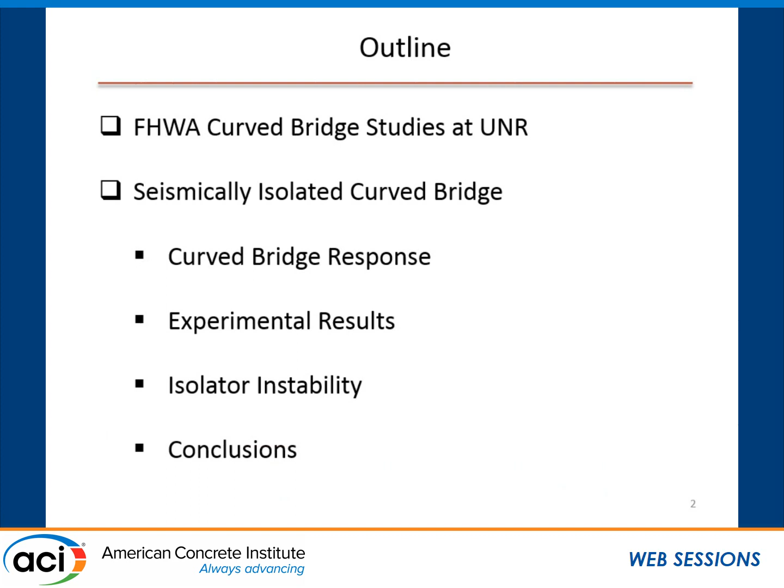Okay. So originally the co-chair of this session was Ahmed Abdel-Mohti, because he recently moved to a new university. So anyway, the topic is performance of horizontally curved highway bridge with seismic isolation. So this is the outline: FHWA curved bridge studies at UNR, then seismically isolated curved bridges, talking about bridge response, experimental works, and isolator instability, and finally conclusion.

So at UNR, they conducted a shake table test on an almost large-scale curved bridge, where they also had live load on top of it, trucks. Although they are not moving, they had trucks on the top of the deck. And the total length was 362.5 feet for the prototype. And they reduced it to almost like a half model. The model was 145 feet.

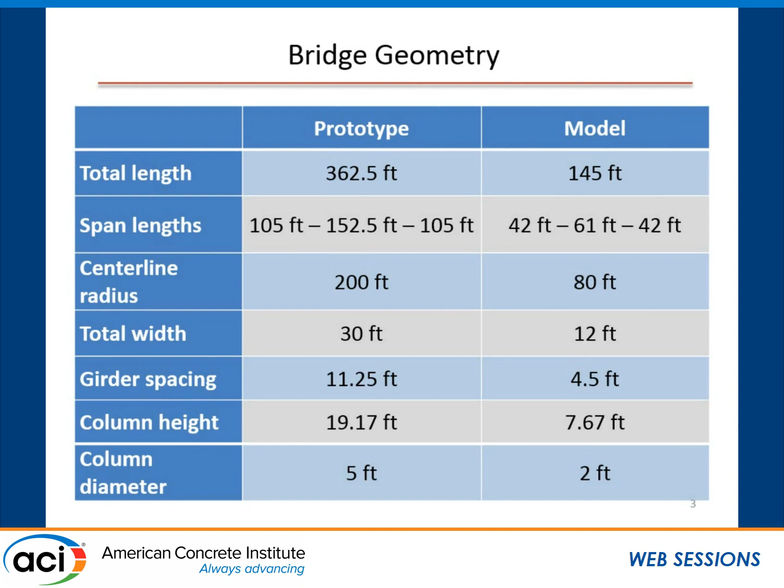The prototype had 105 feet, 3 spans. But the model also had 3 spans with 42, 61, 42 feet. And the center line radius was 80 feet for the model, and the width was 12 feet. The girder spacings were 4.5 feet. Column height was more than 7.5 feet, and column diameter was 2 feet. So this is the setup where they used shake tables to perform the test, and also had the abutment.

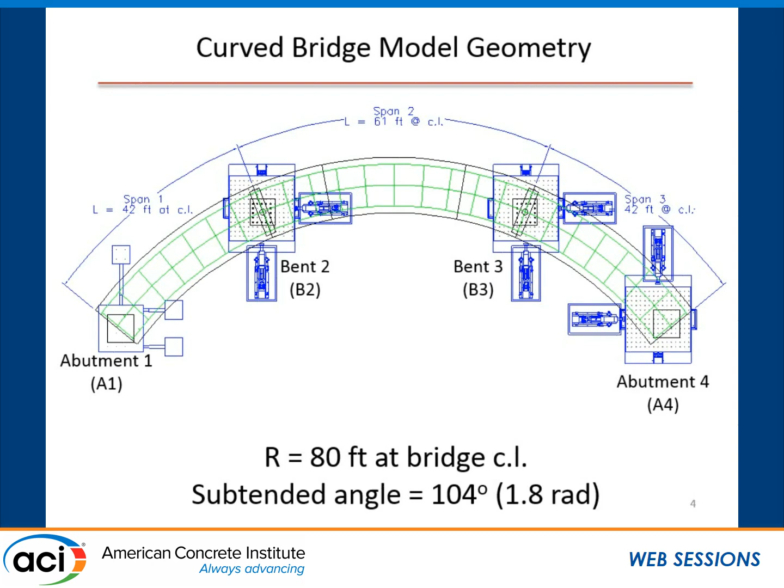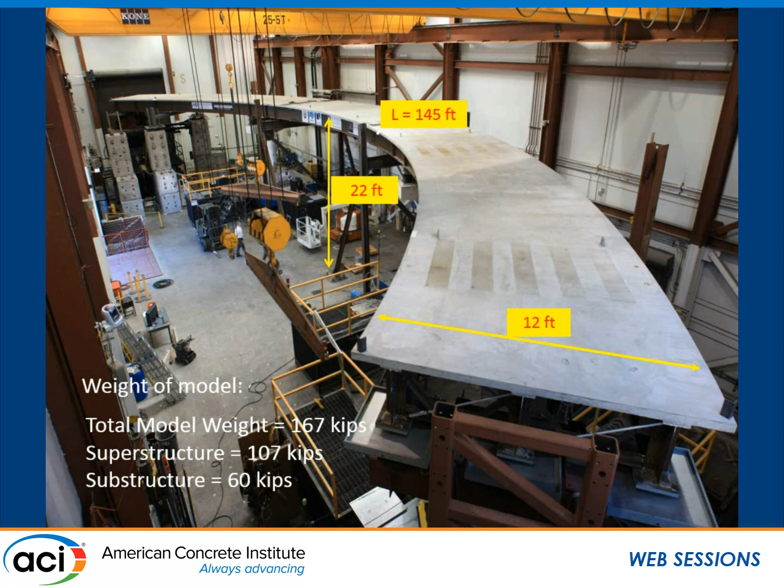So this is the picture. What Muhammad just presented in his last slide in the thank you note. So I thought Muhammad is familiar with this, and I was requesting him whether he can present it.

So the experiments that they performed: conventional bridge, 104-degree, steel bearings, 24-inch diameter columns. It has sacrificial shear key elements at the abutments. And the conventional bridge with live load, it had 6 trucks, and the bridge was isolated with 12 lead rubber bearings, and the hybrid isolated bridge with 6 LRB isolators and ductile cross frames, and they also considered the abutment pounding, and also the columns, they were rocking columns.

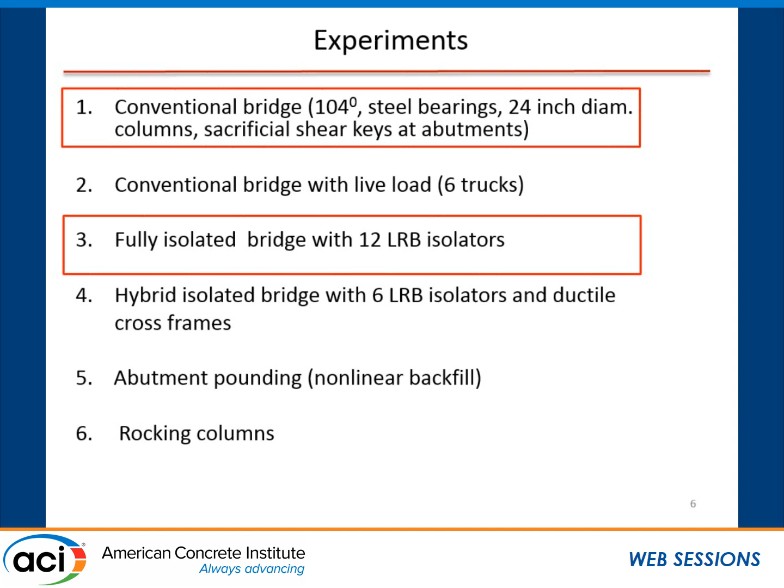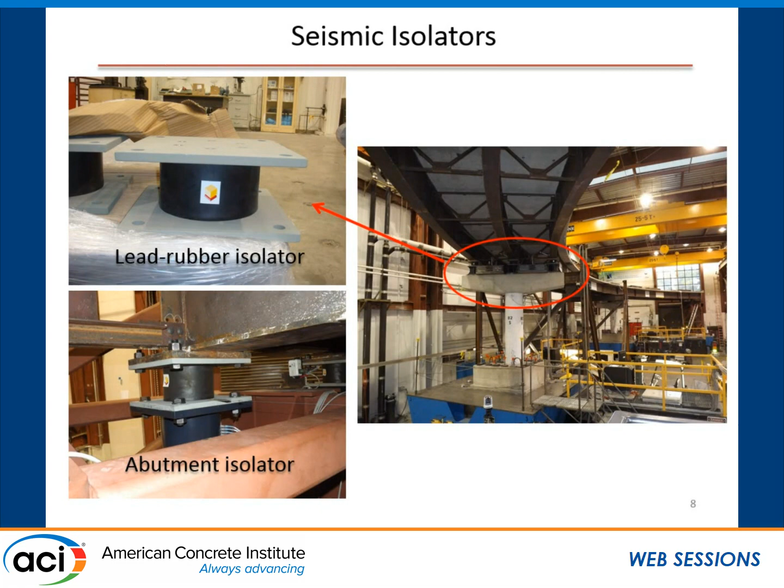So this is the lead rubber bearing that you see, which was placed underneath the girder, and this is the abutment showing here with the isolator, and this is the lead rubber bearing, one at the abutment that was used and one at the pier level. So the shear modulus was 55 psi.

The abutment had a lower bonded diameter, 7.5 inch, whereas the one for the pier was larger, and the layer thickness was 0.25 inch each, total rubber thickness 2.75 inch, total height 7 inch, and the lead core for the abutment was 0.25 inch less than the pier LRB, and the stiffness for the pier LRB was higher, 1.24 kip per inch, and the characteristic strength QD was 2.03 kip, which was also larger.

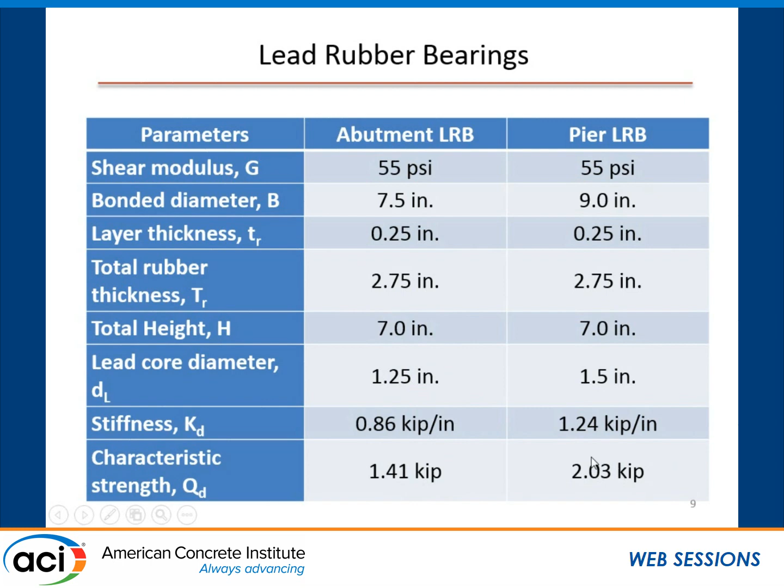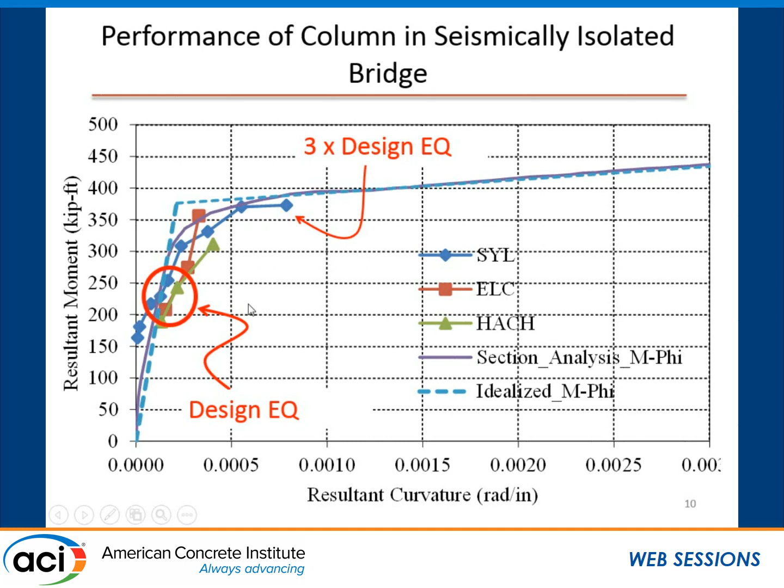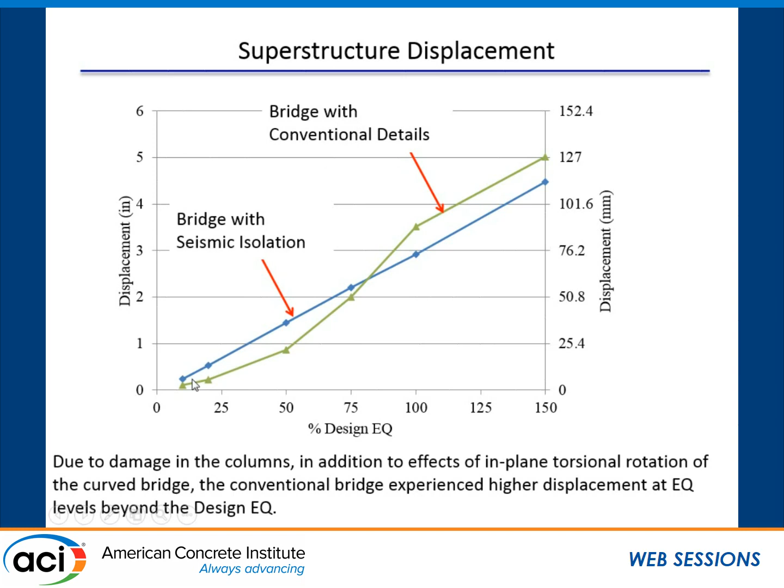And from the shake table test, what they have also observed is when you have an isolated bridge, the response is proportional to the displacement as you increase the earthquake load, whereas for conventional details, you have this kind of nonlinearity.

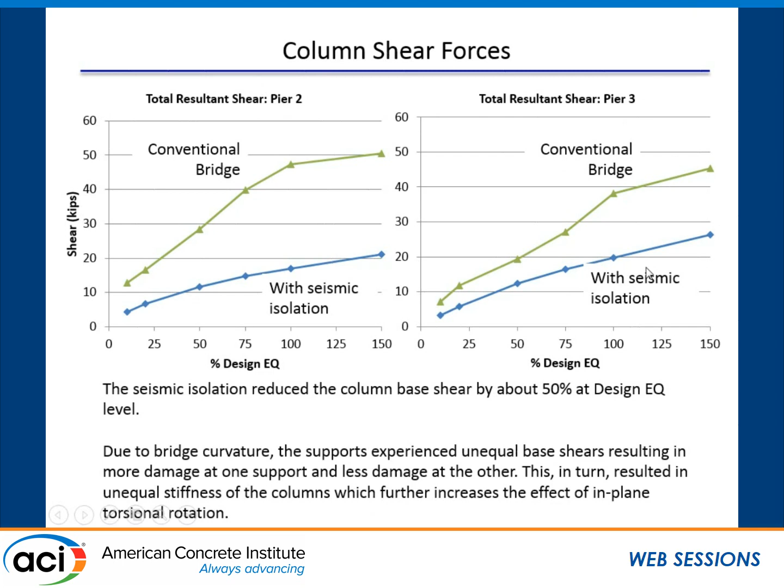And they also have observed from the shake table that the pier experiences much lower shear demand compared to a conventional bridge when you are using isolation, the LRB isolator. You see it's significantly low compared to conventional bridges, and this is for pier number 2 and this is for pier number 3. So in both cases you see that isolation has benefit in reducing the shear demand in your bridge.

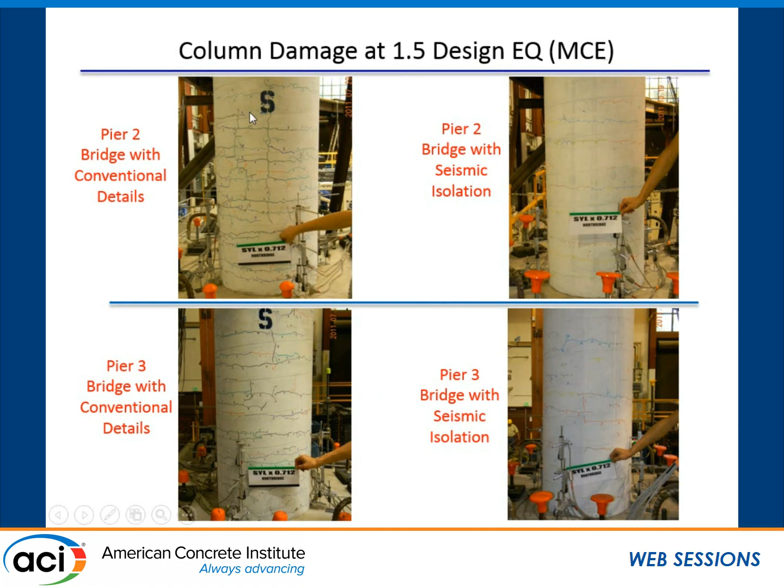And also, since this is less, obviously your bridge with isolation will experience less amount of cracks, as you see very minor cracks in your pier 2 and pier 3, whereas in the conventional pier you had severe cracks all along the height. So this is with 1.5 times the design earthquake level.

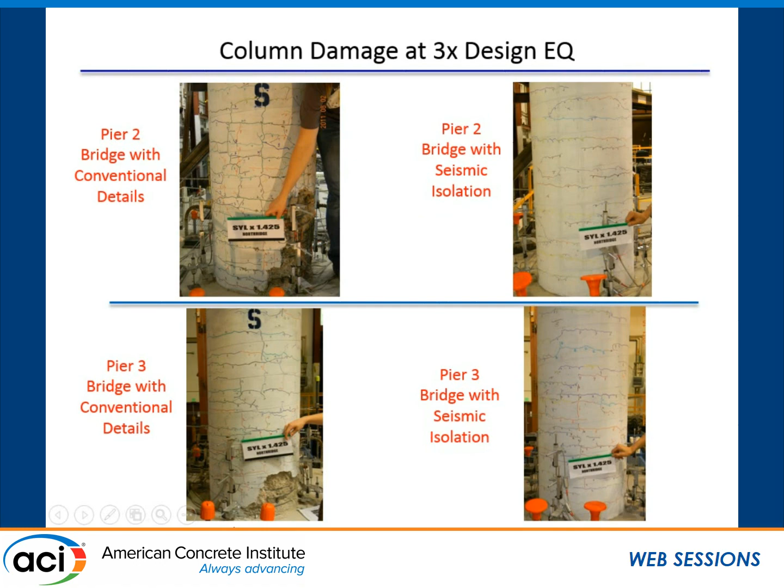So again, the pier with seismic isolation experiences very minor cracks, not visible, whereas in the pier with conventional details, you have large cracks that you can obviously see, and you see that at the base they didn't even experience any spalling, and here you have significant spalling of concrete at the base at the plastic hinge region.

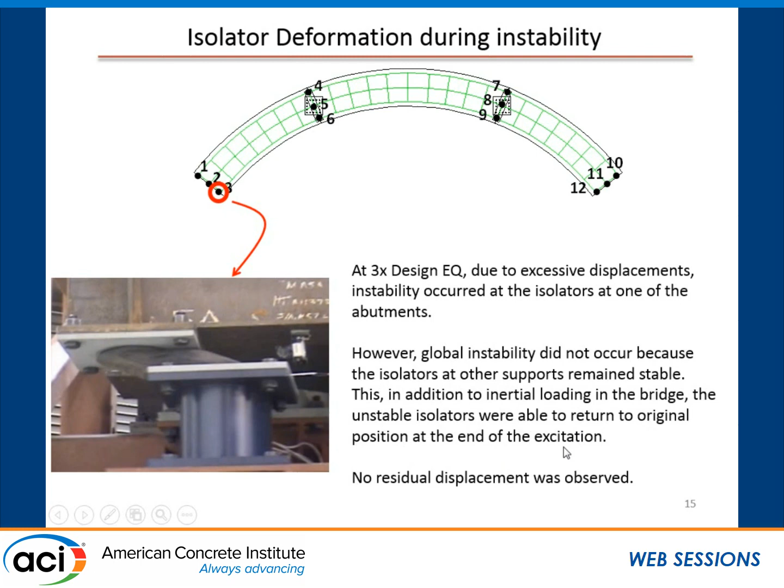So you see at 3 times the design earthquake, due to excessive displacements, instability occurred at the isolators at one of the abutments. However, global instability did not occur because the isolators at other supports remained stable. In addition to inertial loading in the bridge, the unstable isolators were able to return to their original position at the end of the excitation, and they did not observe any residual displacement.

So this is the video. Let me run the video. Okay. So it looks very flexible, the LRB. So it is coming back to the original position. So again, this is 3 times the design level earthquake.

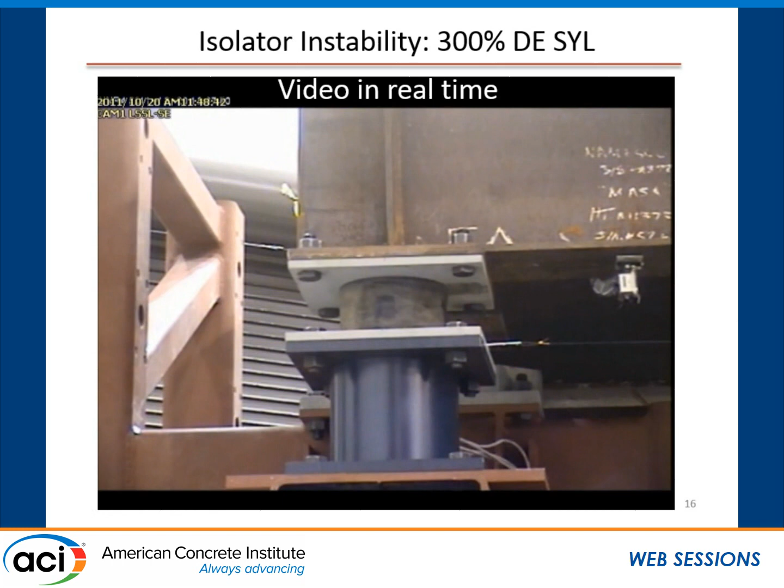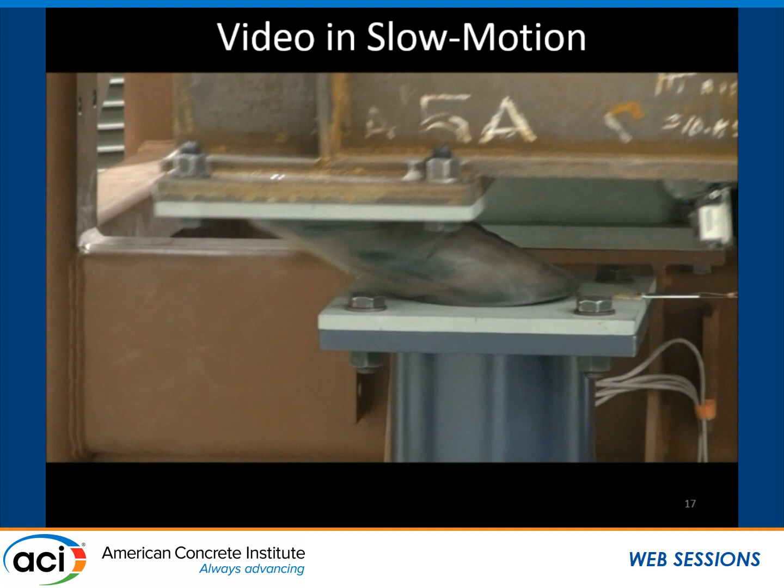So this is interesting. If you look into the hysteresis of LRB, you expect under very large shear strain some residual deformation. But from this test, they found that there was no residual deformation. So, I'm not sure, maybe there is something that is not regular LRB. If it is regular LRB, you expect there will be some residual deformation, but it did not have.

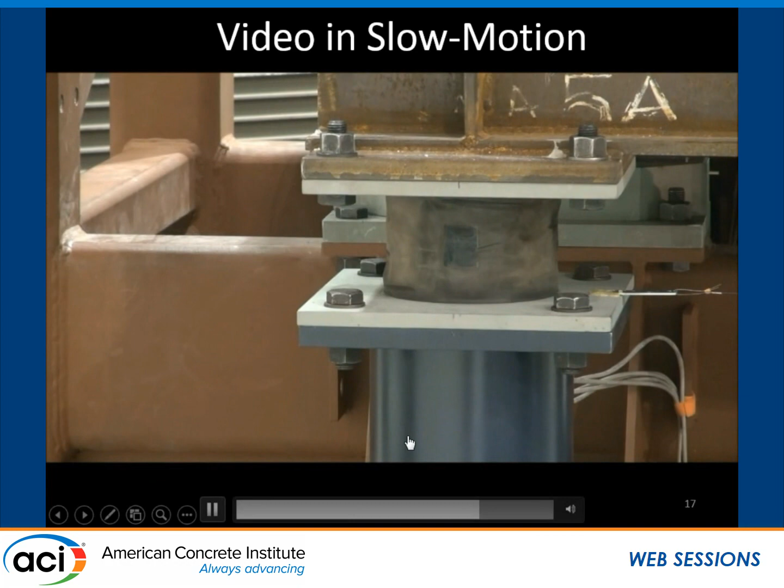So now it's coming to the very stable position. Okay. So the concluding remarks: essentially elastic behavior of columns can be achieved in a seismically isolated bridge even at earthquake levels equal to 3 times the design.

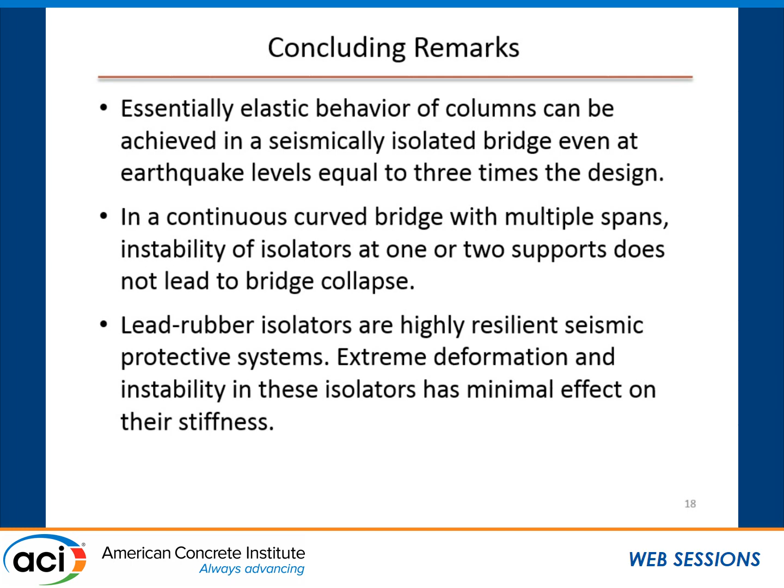In a continuous curved bridge with multiple spans, instability of isolators at 1 or 2 supports does not lead to bridge collapse. And lead rubber isolators are highly resilient seismic protective systems. Extreme deformation and instability in these isolators has minimal effect on their stiffness. Okay, so that's the conclusion, and thank you for your patience.

Yes. You had that much movement at the bearing point. Could you comment on the structural ramifications to the surrounding elements that might be affected by that movement? If that happened, in the hypothetical case? Yes. Damage surrounding it, essentially.

Obviously, I know you came late, this is not my research, but I'm presenting on their behalf, so I was not present. But obviously when you have this much large shaking, if you did not design other elements to accommodate this kind of deformation, you'll have many kinds of damage that you can experience, yes, for sure.